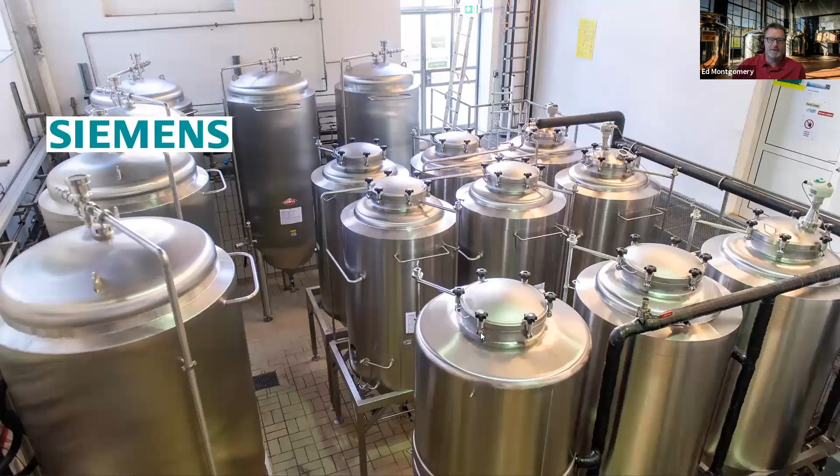A little bit about the history of Siemens in the brewing industry. Siemens has a long history of innovation and automation dedicated to the brewing industry. This slide shows Siemens having a very long history of being a reliable partner in the brewing industry. You see all the way back to the 1970s, Siemens introduced the first PLC-based recipe-controlled automation system in a brewery. And all the way back to 1993, Siemens innovated their brewing solutions with the Windows operating system. All of this goes to reliability, consistency, and quality combined being the key factors for our long-lasting, successful presence in the U.S.

Today, there are thousands of breweries, and certainly malt houses, distilleries, and wineries that are operating with Siemens.

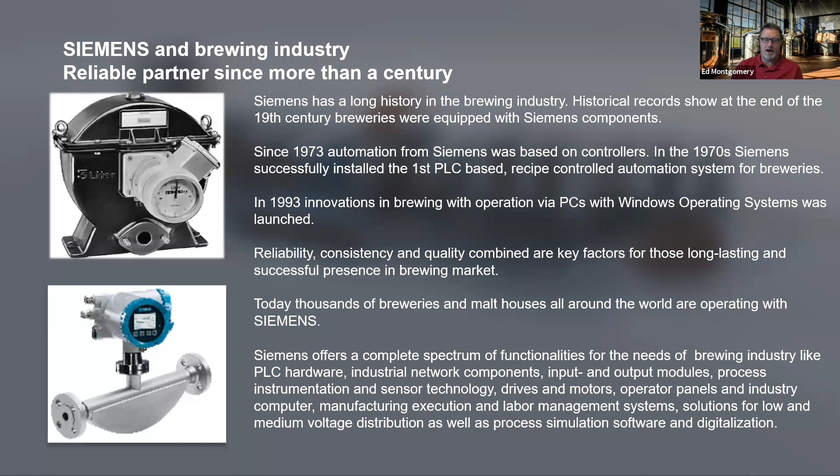But we're going to concentrate today on a lot of these smaller breweries, the smaller craft breweries. Some of the challenges within the craft brewery are time to market - when they come up with an idea and how to get it out there with quality - and always part of their mindset is keeping the cost down, and certainly the environmental and health, safety, and security are always on the forefront.

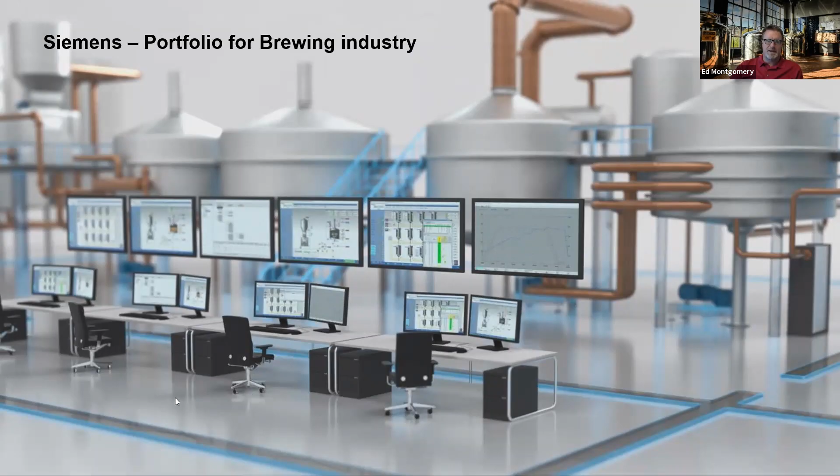And this is where we can really utilize some of the solutions I'm going to talk about here. So, some of our portfolio for the brewing industry: all of our automation systems today are based on what we call the TIA portal. The TIA portal is our main programming software, with one common database, a consistent unified operator concept, common central services, and everything from your HMI, industrial PC, controllers, distributed IO, drives, and motion control within your entire automation system is handled by the TIA portal.

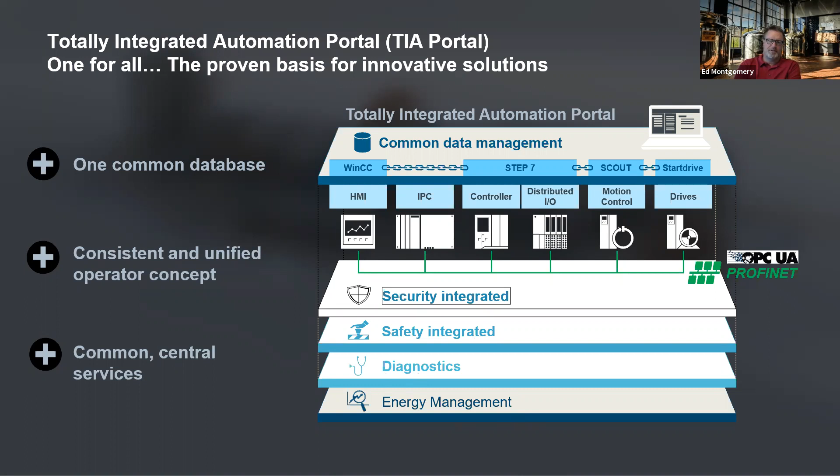Whether you use the Step 7 part of it to program your controllers, with a quick link over into the HMI, which I'll show you, or quick links into our drives and motion control systems. All part of the TIA portal has security fully integrated, along with safety systems built in, diagnostics and troubleshooting, as well as energy management, so you can take your motor control systems and switch gear directly into the control system and monitor your energy consumption.

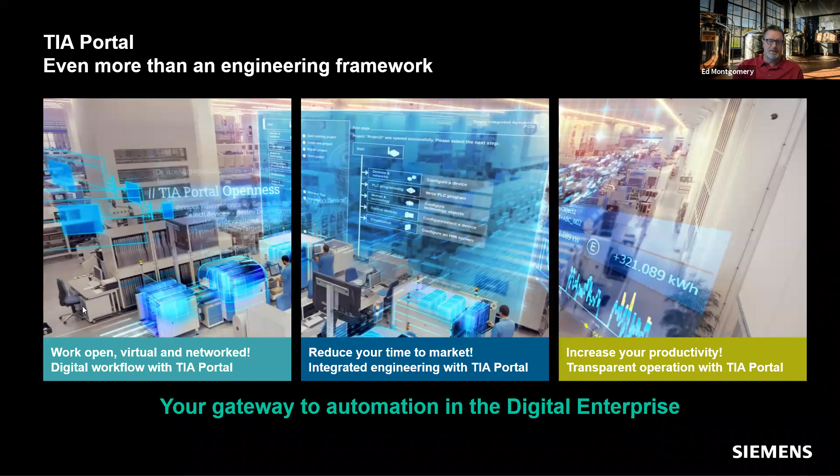So, a couple of last slides here on the TIA portal. Let me skip over this one. The TIA portal is at the center of all of our different software, whether PLC programming software or HMI software. Those are certainly available separately, but you will have the TIA portal with just that module if all you want to do is program a PLC. And likewise, if you don't use our Siemens PLCs and want to use our HMI, the same applies with the TIA portal and WinCC. But all of this is built into the TIA portal.

And then on the outside here, you have all of these different products, like the simulation system.

It's an extra cost to the TIA portal, but it's fully integrated into that. And when you want to run your brewery on some other device other than your HMI, we have our web system that you can buy, and it integrates very similar to your WinCC.

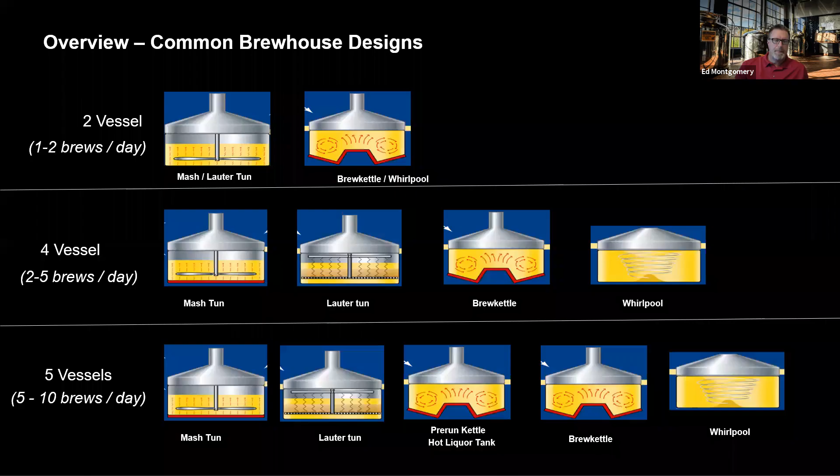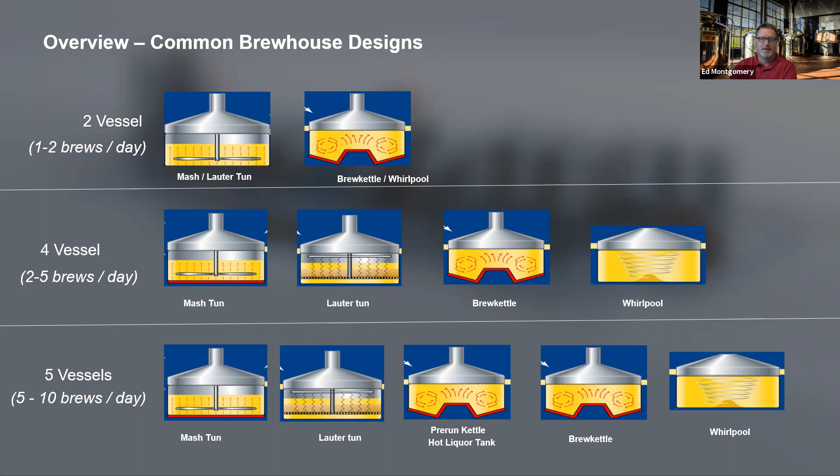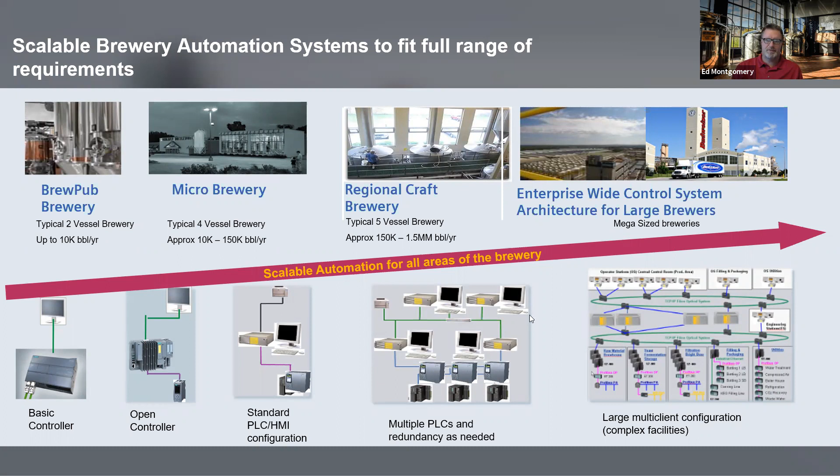Okay, so some of the common brewhouse designs. A small brewery is a typical 2-vessel brewery with the mash lauter tun and the whirlpool. And when you need a few more brews per day, it's helpful to have either 4 or 5 vessel brewing systems. So what that means here is if you have a small brew pub, you can use this exact same solution on a very inexpensive basic controller, all the way up to some of the largest breweries in the world, and up to our full Braumat based system. So anything in these breweries, it's completely scalable from the simplest to the most complex brewery solution.

So some of the main features of this TIA portal brewing template: it uses standardized open libraries for the TIA portal, and it utilizes WinCC. Now, instead of having the HMI being based on SCADA, you can mix and match any type of HMI, whether you have SCADA panels or basic, and all of them can operate and do everything from every location that you want to.

A very common practice is to put either a small panel or a basic controller out at a fermenter, and then have the SCADA in a control room. Another common practice you see more and more now is everybody wants to operate their breweries from their iPads or their tablets or even their iPhones. And certainly that's all part of WinCC's HMI system.

The standard brewing template that I created is based on a known craft brewery design. And like I said before, it's fully open source, so you can modify what you need to as your needs require. Should you get stuck or something doesn't work that you're trying out, you can always go back to what's in the brewing template and start over from there. So you're standardized with a known brewing solution. Be in control of your own destiny.

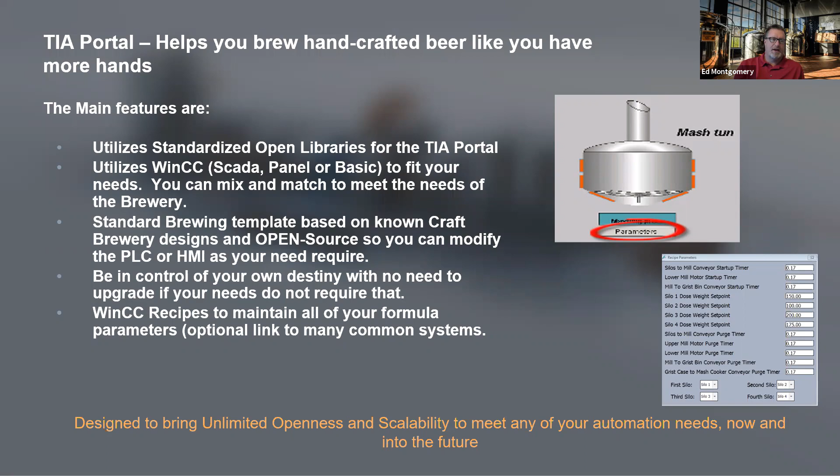So let's look at the brewing template itself here. Like that one screen before shows, the TIA Portal programming software is just the version number, version 16 or higher, but it's fully migratable to all of the future versions once they come out.

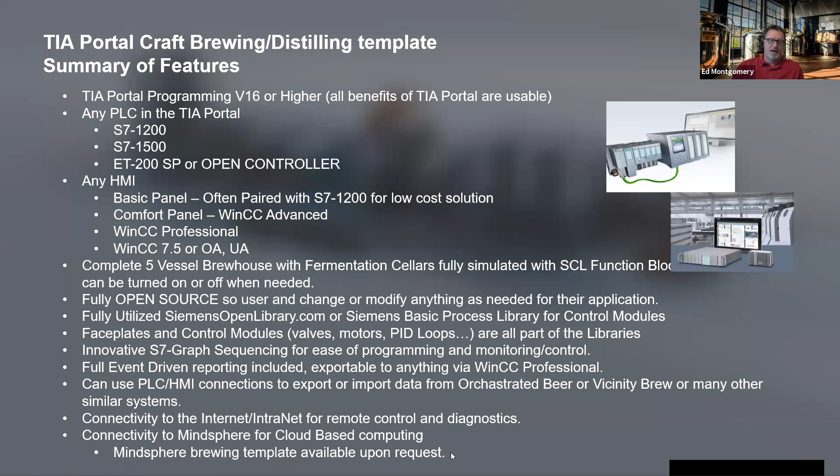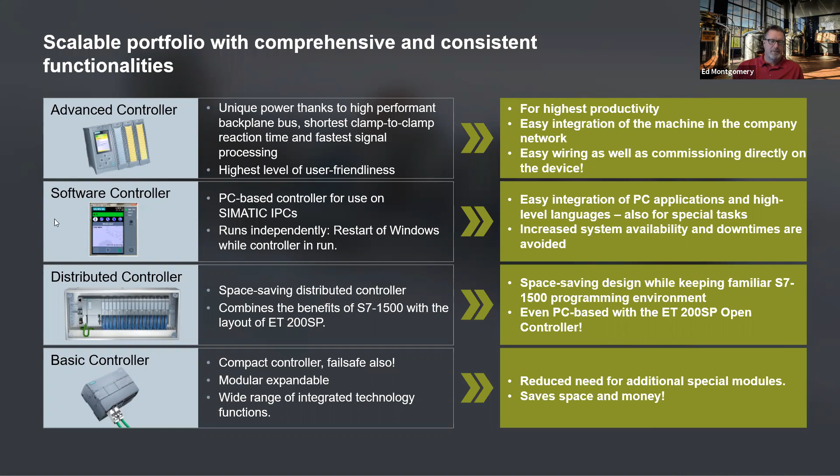So these are the different controllers. You go from the basic controller down here at the bottom, that's maybe a couple hundred dollars, all the way up to our advanced controller, which starts under $1,000 and goes up from there. So you have a wide range of controller options that you can use. There's software controllers, there's integrated PLCs right on the distributed controller. And then you can pick your HMI for where you want to control your process from.

Is it a SCADA system that you want with full client-server capability and database, everything behind it? What's most common are the panel-based or PC-based HMIs. Those are available. And then the basic HMIs—this is just something to get the numbers out there for somebody to see.

And we have whatever location, and these are very inexpensive. So if you wanted to do integration on a small craft brewery, you can easily grab the S7 1200 or

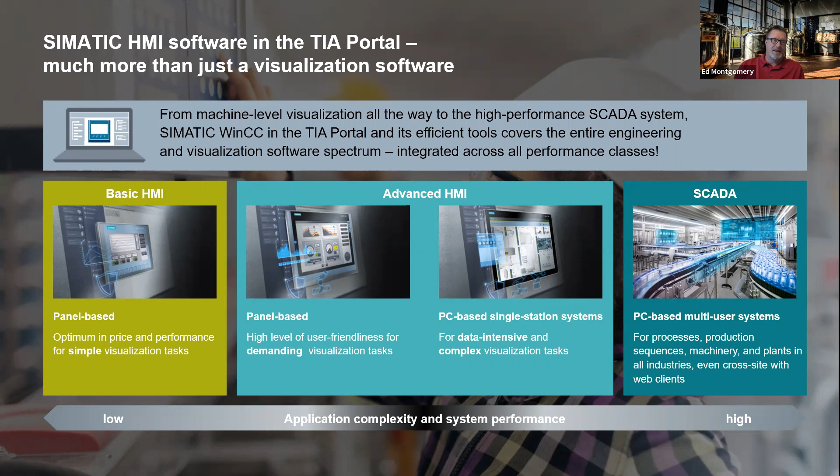a small S7 1500 controller and a basic panel or a small HMI panel, and you're not over a couple thousand dollars of hardware, and you're able to start integrating a brewery. Now, one thing that every brewery wants nowadays is to operate, control, and monitor your brewery from your mobile devices. There's a lot of different stories I have over the years on the customers realizing the benefits of being able to crawl under a piece of equipment with their cell

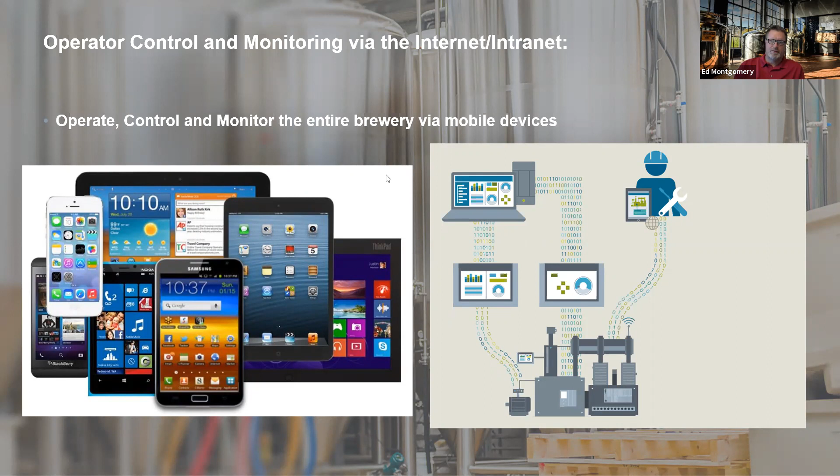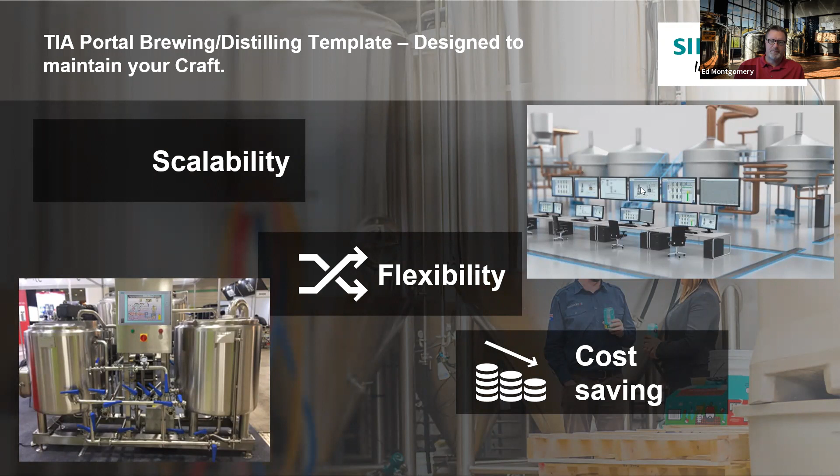phone and being able to open and close valves instead of radioing up to the control room. So all of that's included here. This is just a slide to show that we can go from a very small brewing system here to a very large brewing system, all with the same system here. So then we'll look a little bit.

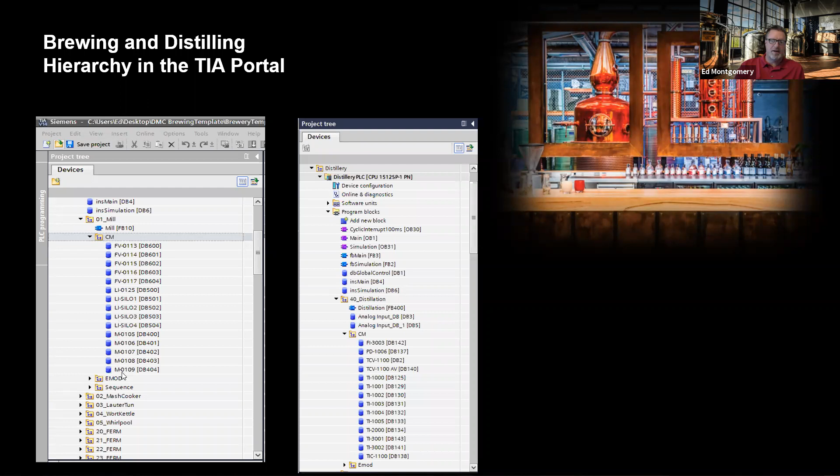This is the TIA Portal brewing software. So if you look at this, it's arranged in the unit concept. So here's the mill unit. Within the mill, you have your control modules - these are your valves, pumps, motors, level indicators, sensors, and whatnot. And then you also have your equipment modules, which I use that equipment module folder for the simulation.

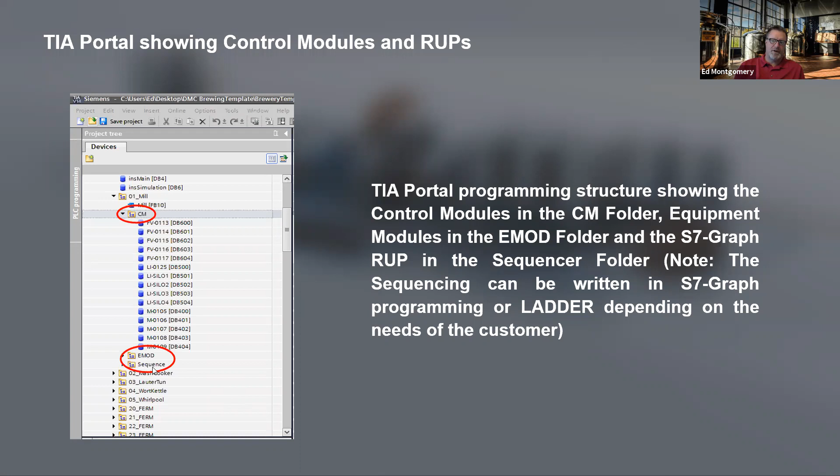And then the sequence - you'll use your sequence folder here for all of your S7 graph recipe procedures.

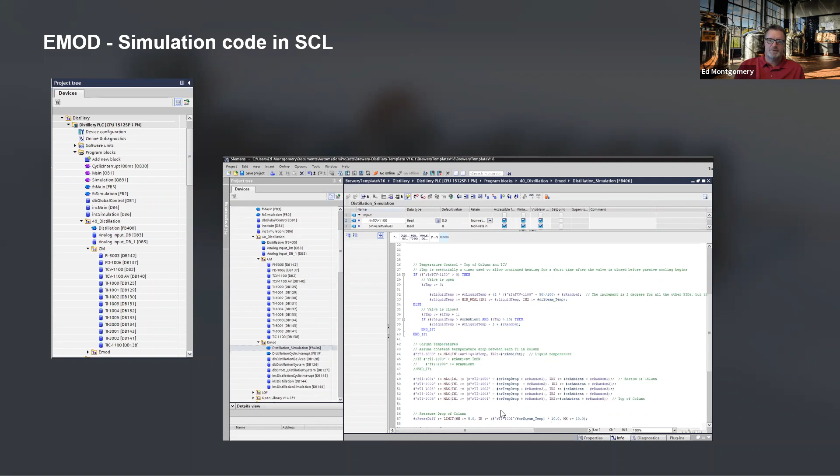So a little look at the simulation code - you can open up, like, this is the distillation simulation. Your if-then-else loops are all right in there, and you can modify this to fit your needs. You can test everything and make a virtual beer. It's a dry beer, but you can make a virtual beer on the system long before it ever hits your customer's facility.

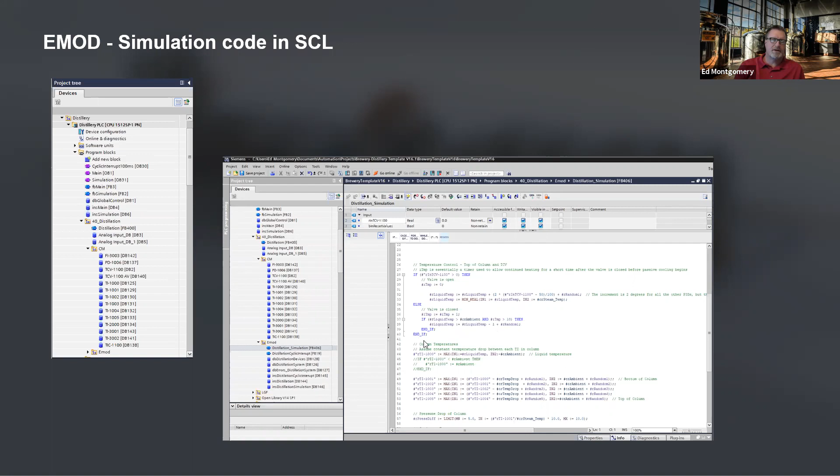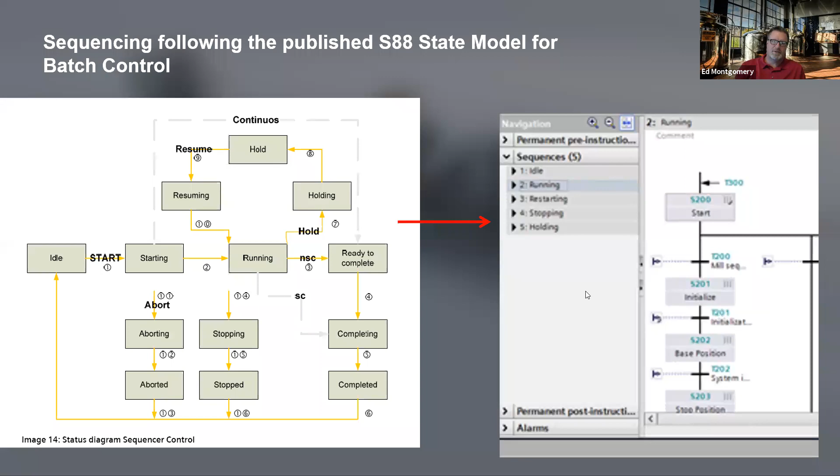So you pair that sequence with a data block, and that data block here will hold all of your recipe parameters. And this is virtually unlimited in size - it's only constrained by the amount of memory you have in your PLCs, but that's a lot bigger than anything that you could put here.

So that provides you a lot of flexibility for your brewers, that they can modify the recipe right from the parameters, and they never have to get into the controller and make changes.

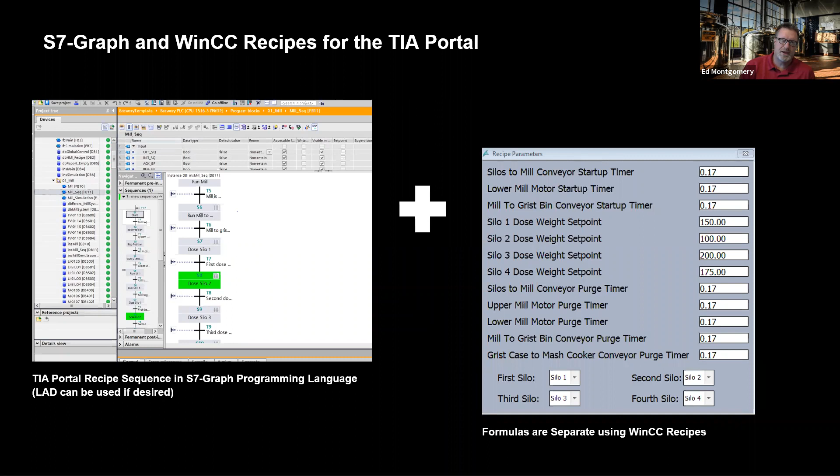So if you're making a light beer, for instance, you can have all your recipes for light beer, and then if you make a dark beer, you can just use a different set of recipe parameters.

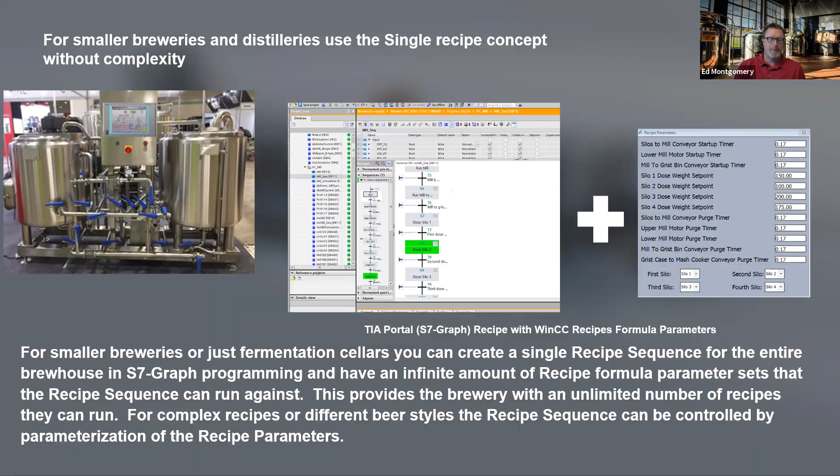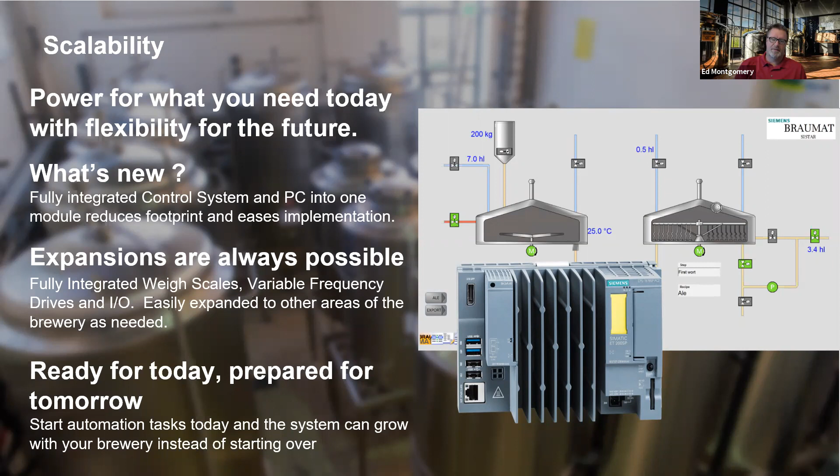So it makes it very cost effective for a craft brewery. Oh, that slide was out of place, sorry about that.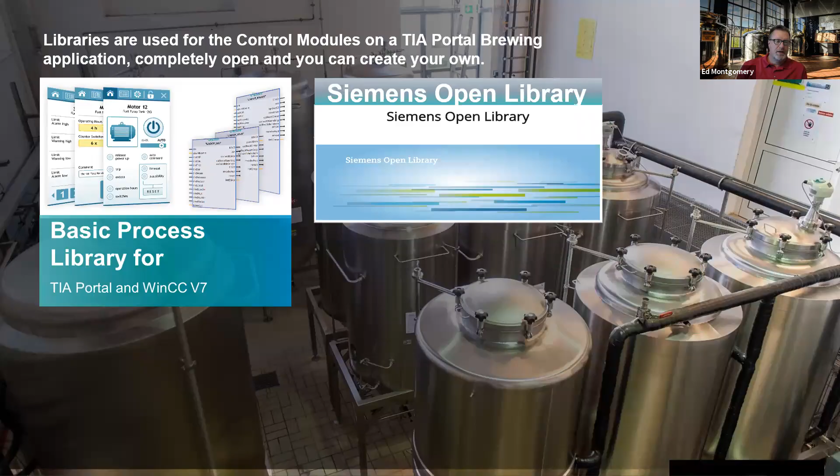This slide shows a little bit about the basic process library. You have all of your function blocks for your PLC in the library. So if you want a valve, you just grab that function block, put it in there, and then you can use that function block a thousand different times in your process, even more than that. And then it links directly to a faceplate on your HMI system.

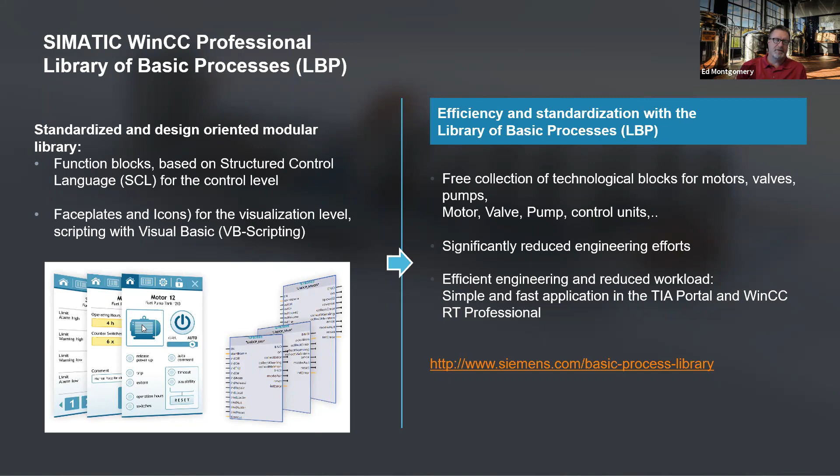What's neat is to do that using our system called SiVArc, Siemens Visualization Architect. You're able to take your PLC program and your HMI library and use the SiVArc rules, and it creates your screens for you. So this is a huge time saver. Once you have your system identified that you want to roll out to the brewing industry, you can virtually program your entire brewery from an Excel spreadsheet, then run the SiVArc tools against that spreadsheet, and it creates all your screens, does all your programming, and you're left with a complete solution. That's a very efficient tool.

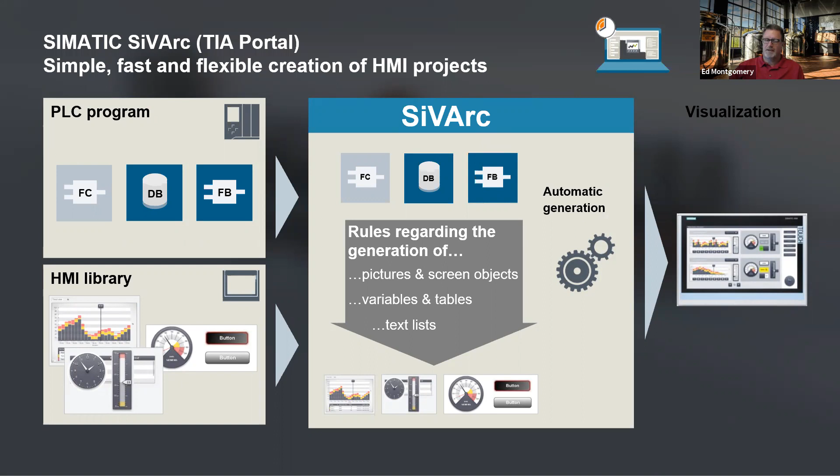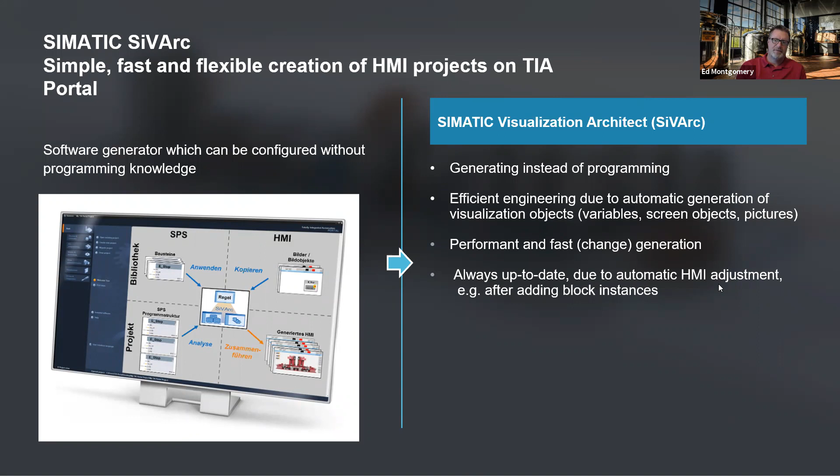If you want to hear more about it, just let us know and we can talk to you about the SiVArc system. This is just another slide on the SiVArc system, which makes for very efficient engineering. Since everything's fully linked together with the TIA Portal, you can use the SiVArc tools to link everything and make your PLCs and your HMI screens for you.

This is a common request with all of the craft breweries: remote diagnostics. If you're in Colorado and your customer's in Maine, you don't want to have to fly on an airplane every time you go check it out. So we have this WinCC Web UX, our web portal. You can take whichever handheld device, or even a process screen, and run it on the Web UX portal, and be able to remotely diagnose and help your customers with a problem they may have.

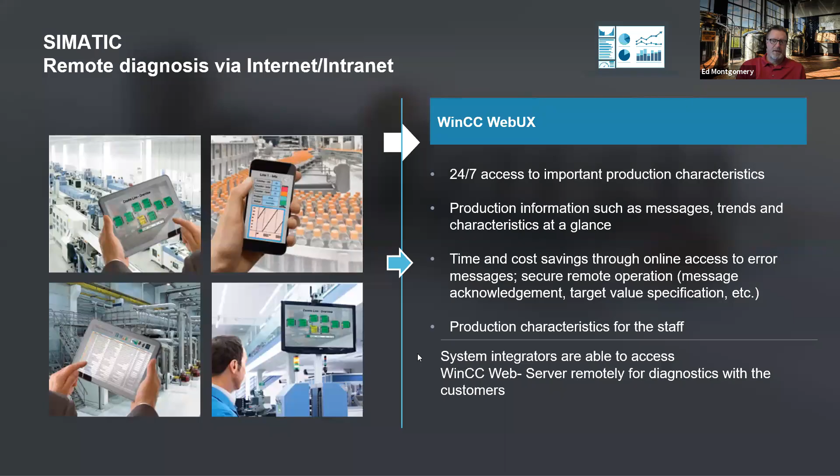Another common concern of craft breweries is they don't have a lot of money to invest in different sensors, like pH sensors and color sensors. So they may take those samples, and a specific gravity sample, off to the lab, and then take your lab readings directly into the system. We have simple screen-based operator prompts that will prompt the brewer to go step by step through the brewing process and input manual data. When they input the manual data, it's tracked and trended just like a real sensor, knowing the data is coming from a manual reading, but once it's in the system, you're able to not only monitor and visualize the readings, but also make control decisions based on them. So it's a full mix of manual operations built into your control system. I've had customers with very minimal automation doing everything manually but entering it in, and it's making a batch report for them also, just from having a control system.

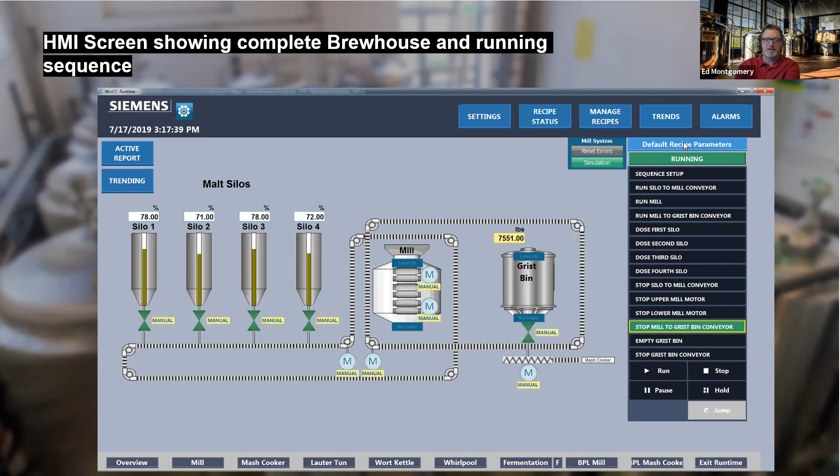Now I'm going to jump off and look at some of the HMI screens, and show you some of the details. This is some of the HMI screen for our mill, showing the running sequence, that S7 graph sequence that I had running there. You can see it's running this step right now. You can click on the recipe parameters button and look at the recipe parameters right there on the screen. You can change anything anytime you want to, and like I said before, stop, start, hold, abort, and even jump steps right here from your recipe screen.

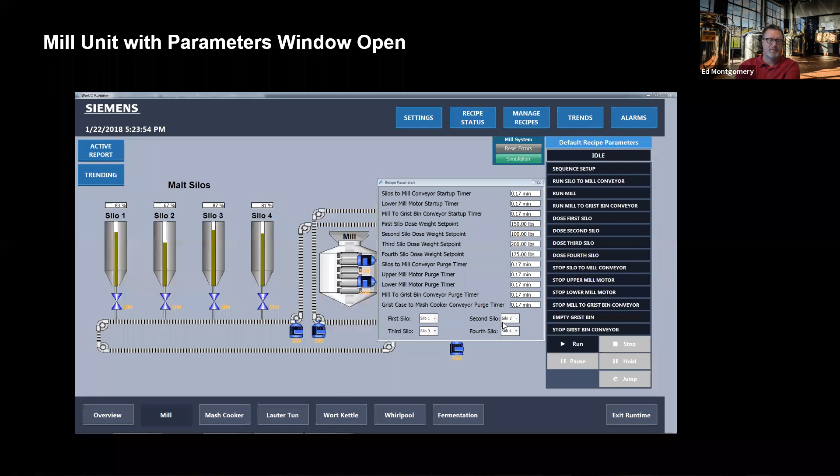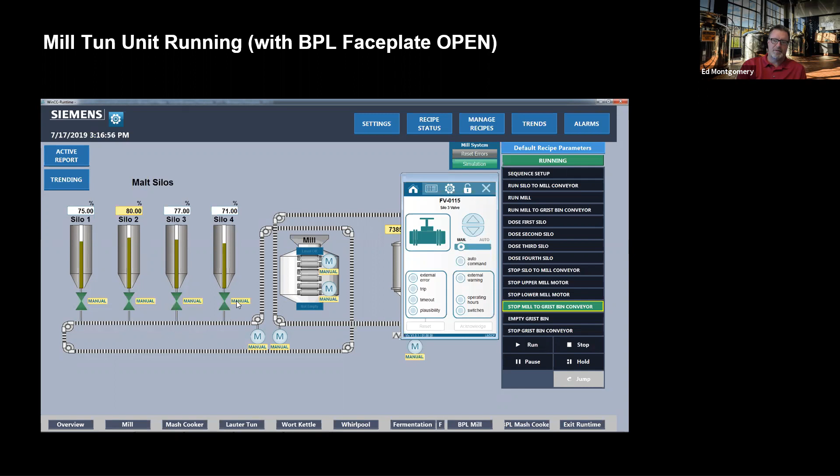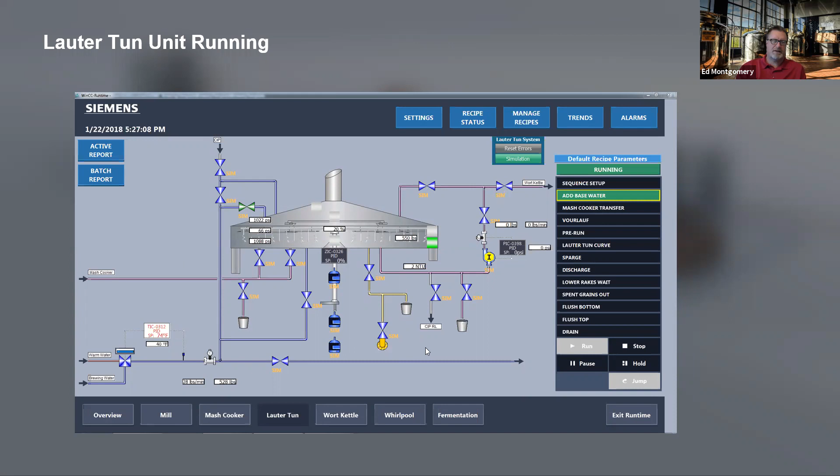And then just to show you a little different faceplates, these are the faceplates from the Siemens Open Library. Again, these are fully functional faceplates. Like here's a valve, you've got the name of your valve there, and open, close buttons there. So that's the Siemens Open Library faceplates.

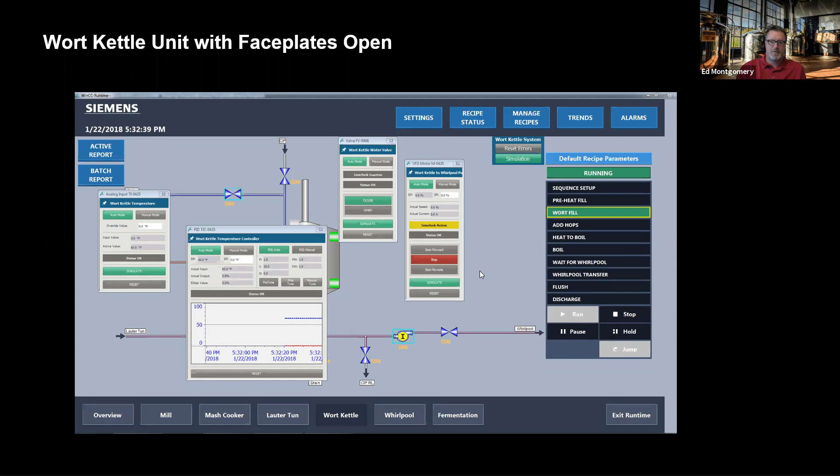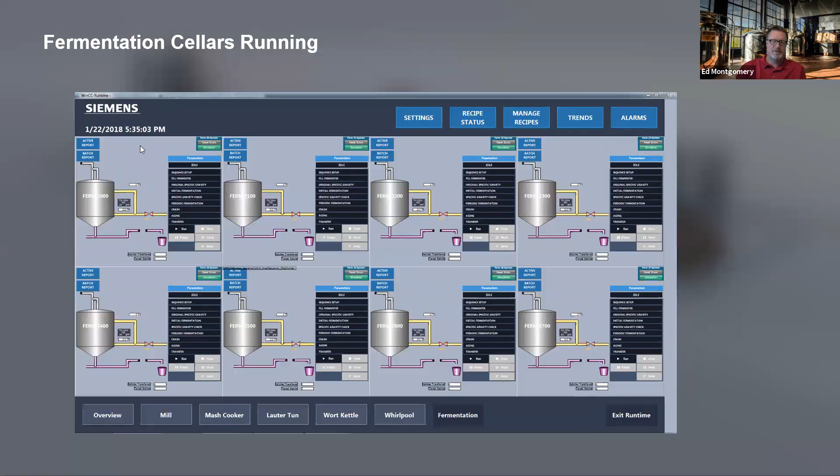This system, I'm talking about beer, wine, and spirits, but you can use this basically for any process control application. It does not have to be a brewery.

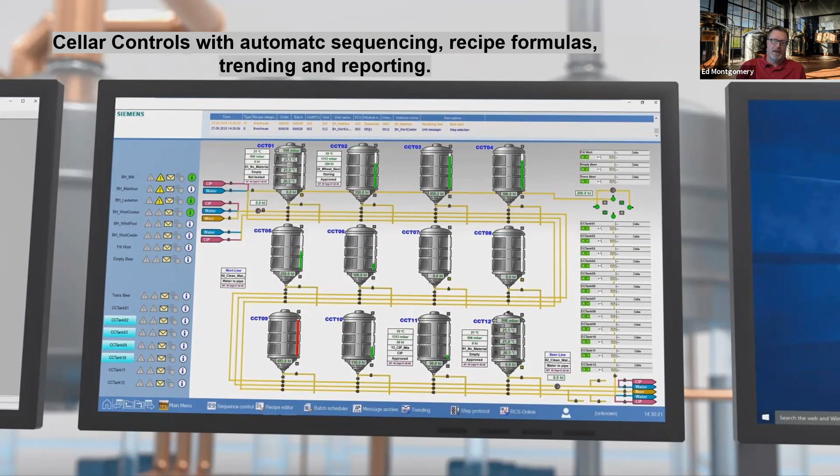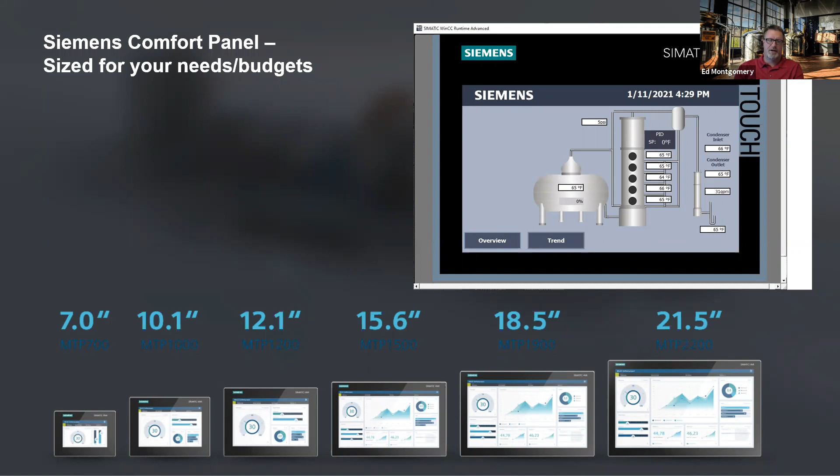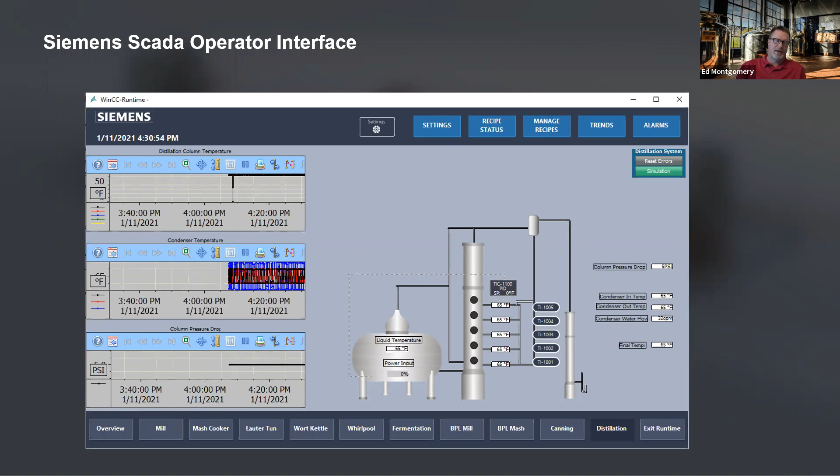And all of these panels also have a web interface so that you can mimic that panel directly on your cell phones. So a little bit more, another look at the Siemens system for distilling. It's not doing much, the temperature's going up and down here, but this is in the same brewing template that we have.

So some of the key points of the brewing distilling template: it allows you to keep the craft in craft brewing distilling, so that your resources can be used on things like sanitation and cleanliness, as opposed to writing values down every hour onto a clipboard. It enables you to increase production without adding staff, letting the operators key in on critical manual tasks. And then, having the quality, repeatability, and consistency of automation, and automating the manual tasks, can greatly benefit a craft brewery.

This is one study that a customer did. It helped them reduce energy usage because his chiller was undersized. So we simply programmed in to cut the cooling off of some of the fermenters when he was crashing one of the fermenters, so that it wouldn't actually heat up some of the other batches. So that's kind of a unique thing that somebody did.

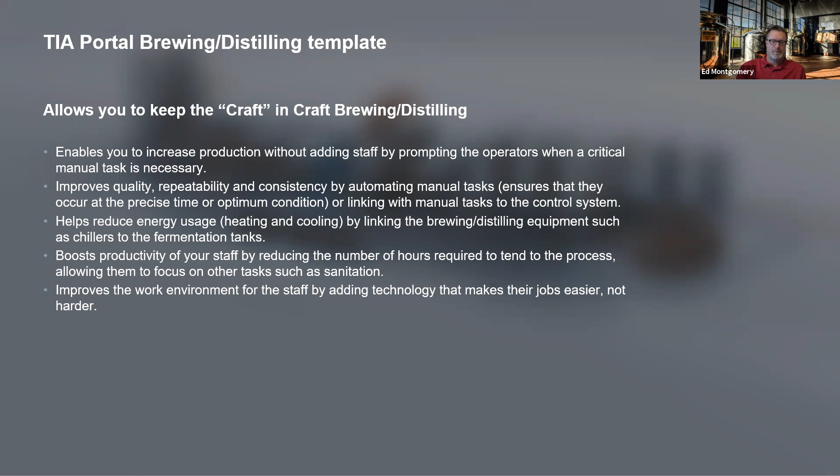And then, this makes the brewers' jobs a lot easier, not harder, and allows them to work smarter. And then you can easily expand this, create new recipes, modify your existing recipes, and try new products just by using that HMI screen that I showed you for the recipe parameters. And you don't need to call out your integrator every time you need to make a simple change. So that's a big selling point with the craft brewing guys.

And then it eliminates the need for manual data collection. And then, we have automatic built-in data collection, so I'll show you some of these in this.

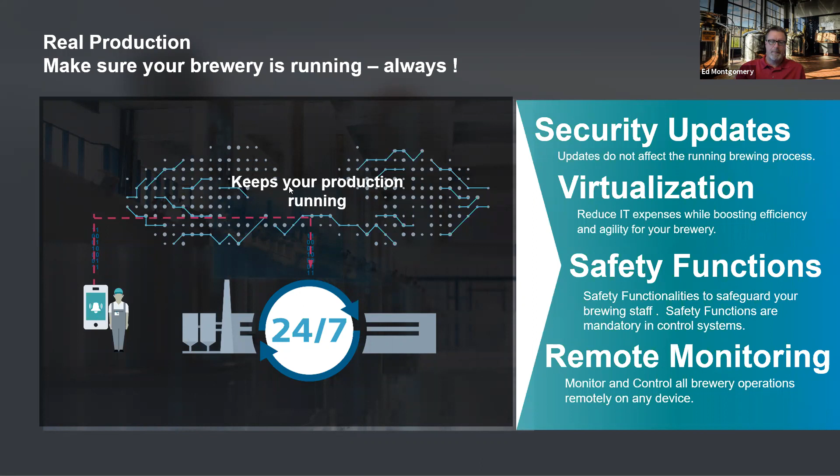Okay, now looking at some of the security, certainly Siemens has a full round of anything you need with security to get your data from the plant to the operator, whether it's on a mobile device, a handheld device, or a fixed device. So you have a full method to do the security.

And then, this is our Braumat system. This is another way to realize some of your step reports and whatnot.

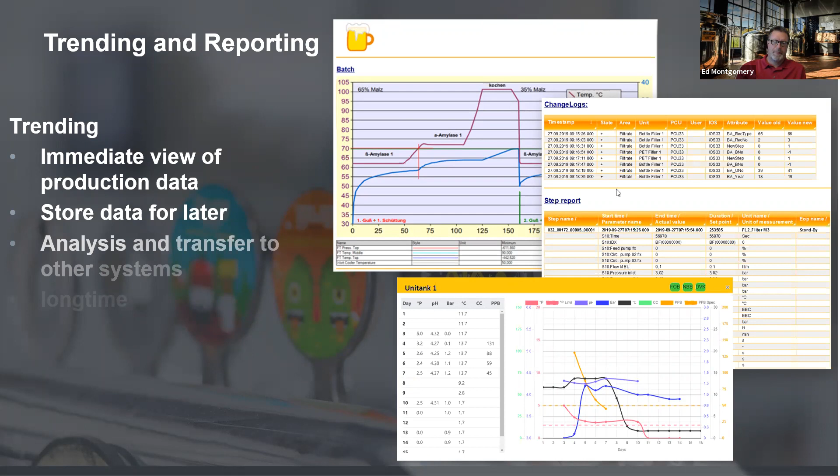Some of the level 1 reporting is just creating your trends. You can export these trends - there's a button here to just export it, and it exports it right out to your CSV file. And then you can actually get into the PLC and show the data directly out of the PLC, because some of the larger PLCs, the S7-1500, have a built-in web server right in the PLC that you can utilize to get your data to wherever it needs to go.

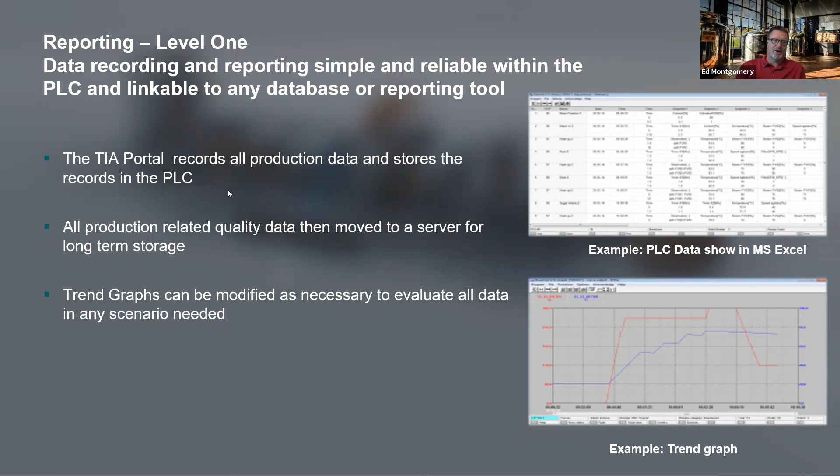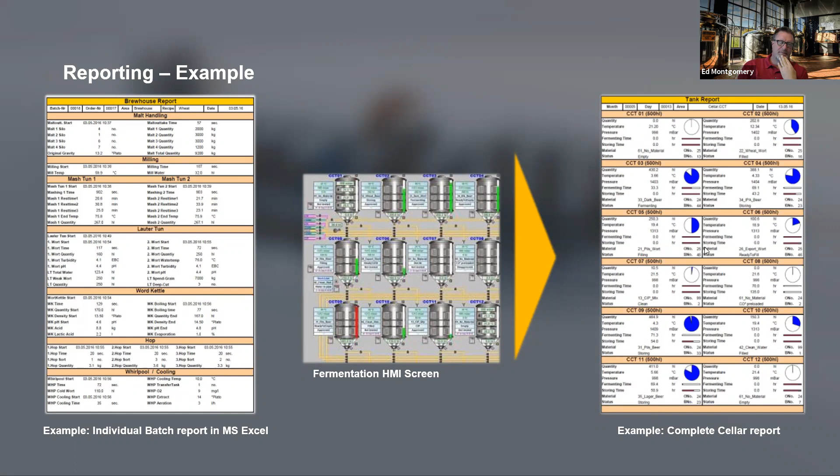To come up with the overall master plan for that facility. And then if they purchase automation equipment from an OEM and then other equipment from eBay or online sales or whatnot, everything can be fully integrated following that master plan that your system integrator put out for you.

So I can skip over here to case studies. We can look at some of them that have used this TIA portal brewing template. This is the Bendt Distillery down by Dallas, Lewisville, Texas. One of our solution partners did this project here, and you can see this, even though this is a distillery here, this is using the same template that we've created. So they're able to utilize that fully in their process. And there's a couple quotes that the people at the distillery put out.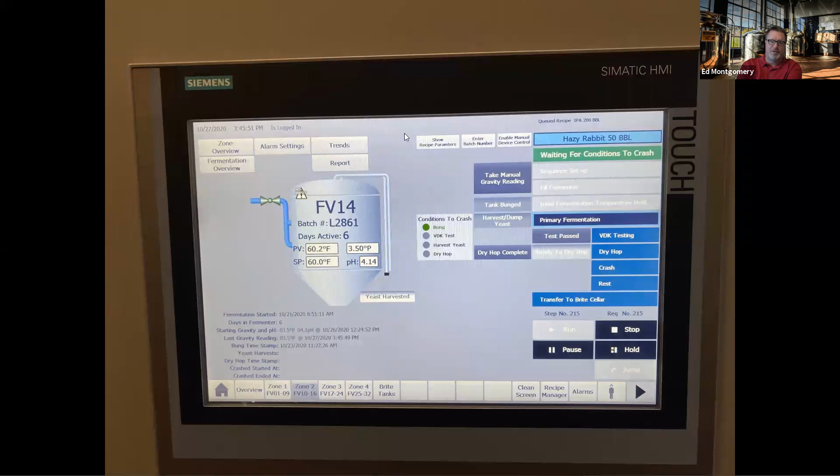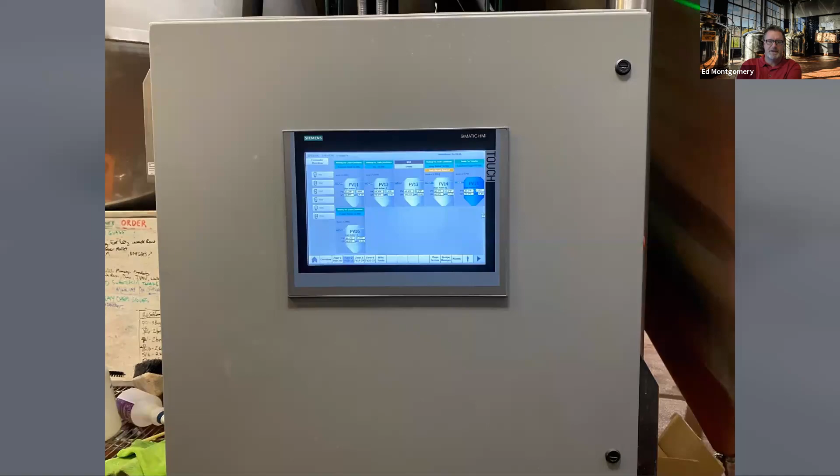And that's all I have for you today. Not sure if you have any questions or comments.

So Ed, we had a couple questions here that popped up, and I thought I'd bring this one up in case everyone didn't see it. There was a question about the IT security aspects, because if you're using mobile phones and iPads, could you talk a little bit about the kind of solutions you guys have seen, like VPN and firewall and that type of thing with the breweries?

Yeah, certainly. That's a very common concern - everybody wants to see things operating from somebody's cell phone or iPad. Siemens has our Scalance line of networking products that provide you with a VPN tunnel that can go directly into your system, giving you a secure VPN into the system and keeping all the people you don't want to have access out.